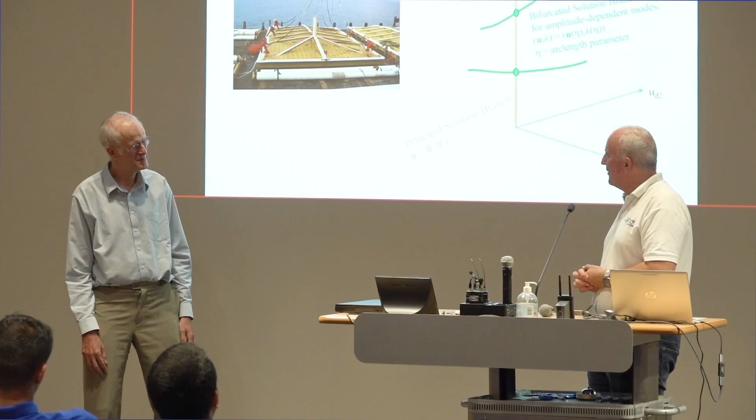Thank you very much for such a kind introduction. Certainly, it's fun to be here. Lots going on, and I've always enjoyed coming here. And so also very pleased to say a little bit about what I've been doing, mainly in my spare time, because I'm not allowed to talk about the things you do for consulting, right?

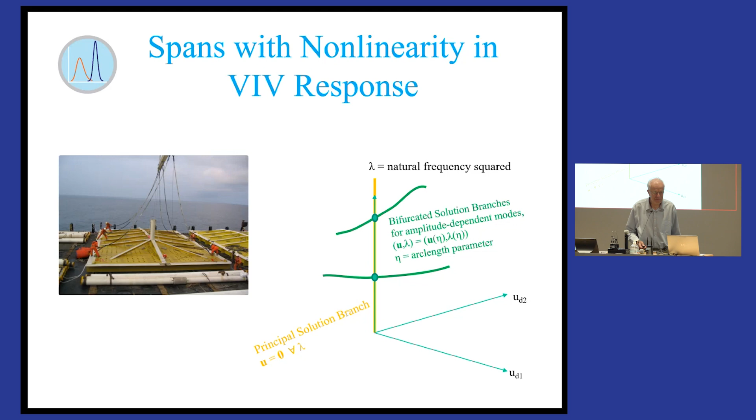So spans with nonlinearity. Okay, let's go. Why spans? Well, when I left Shell in 2016, I thought I was going to be without a job because the oil price was way down. But scour continues to happen, right? And spans continue to form, and sometimes these things raise questions. So I found there was work to do in spans, and once I got involved, I started saying, well, there's a huge amount of work done on spans, but yet when we come to make engineering decisions, there's still quite a lot of uncertainty.

And what are the key points where with relatively little effort we can get something, because I'm not a researcher 100%, I'm more of a consultant. Where are there things that with little effort I can do myself or within the team, and happy to be involved in these things here, make an impact. And then also, as I go, improve tools that you could then use. So the intent is more or less to get tools that you can improve in the actual consulting work.

Very good. Now, how about nonlinearity? Why do we talk about nonlinearity? I mean, it's easy to do nonlinearity. Any computer program can analyze nonlinearity, but it needs to do so in a time incremental way, in a time domain.

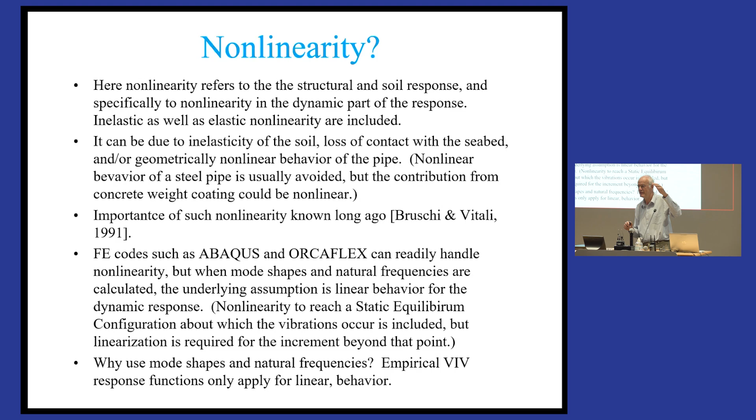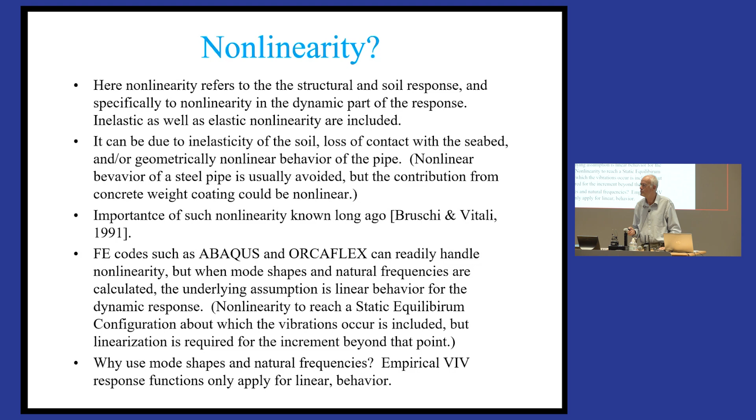It's easy to get rid of that assumption, but it hasn't been done. Why hasn't it been done? Well, the reason that hasn't been done is because there is the VIV involved, right? And the VIV is difficult to formulate in the time domain.

So what people have done, and that's the practice, is use the response functions that are used for this. And this gives you the amplitude of a single degree of freedom system as a function of the current velocity expressed in pipe diameters per natural period of oscillation and the damping. And this then forms the basis of almost all the assessments that I'm aware of that are done in pipelines. Right?

There are several parameters here that are not explicit, that DNV says they're implicit. That means that they have thought about them, but the guidance they give does not include them. That I list there: mass ratio, Reynolds number, roughness, seabed proximity, turbulence. Turbulence is being addressed, I understand. And they are known to influence VIV, but not included. And presumably DNV have done a lot of work to come up with this, have considered all these things and think that for pipelines, this is reasonable and conservative.

Now, unfortunately, there's very little documentation of why it should be this. I have sat in JIP meetings that come up with some of these things, and often there's a lot of interesting discussion. But even while still at Shell, if I asked, well, where's the report that justifies all this? They say, actually, there's a few papers out there. But the papers are not giving you enough information to justify this. But it's accepted and it's widely used. So anything you build on this will be accepted.

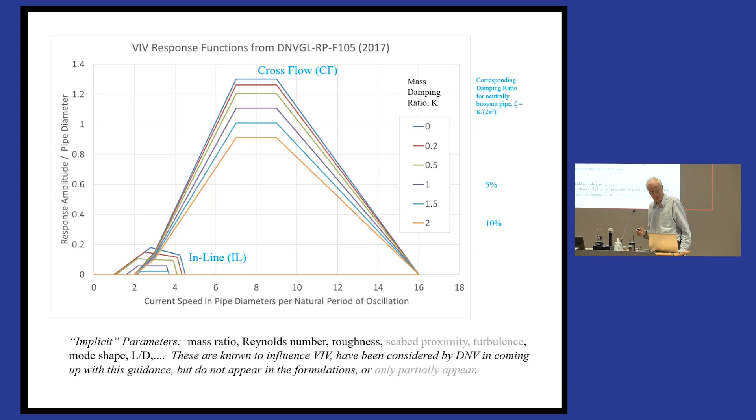Okay. So what are the ways to deal with nonlinearity? I've already referred to the time domain methods. If you do a CFD calculation, that's a highly nonlinear and highly complex calculation because it's 3D and you have to resolve the turbulence. You have to make certain assumptions about turbulence at a scale that you cannot resolve in your grid, so you have to make approximations there. When I talk about nonlinearity, I refer basically to nonlinearity of the structure or of the soil, not of the water, which will always be nonlinear.

So the incremental complexity of making your structure nonlinear in a CFD calculation would not be large. Most of the computational effort goes to the CFD. So that's one way that can be done. But it's very compute intensive. There's a lot of validation, but if you apply it for one case that you are interested in, you ask the question, has there been the relevant validation of this model? That's sometimes a difficult consideration.

And then the simpler, more efficient things are like a wake oscillator. There's a lot of papers on wake oscillators. If you have a pipe with current coming there, the blue arrow means current, the current gives you VIV and forces. And those forces you can represent approximately by attaching a mass to it with a linear spring and a nonlinear damper that basically has negative damping up to a certain amplitude, which gives you the VIV excitation. And beyond that, it goes into positive damping.

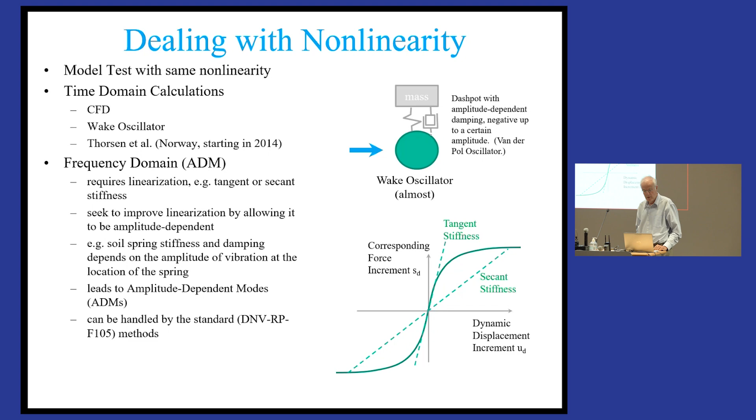So let me now tell you where is the evidence for nonlinearity. It's been known long ago that nonlinearity in spans is important, but still the practice is not doing much about it. But here's our evidence that we collected with the help of UWA for these spans, and this comes from a pluck test that we did on an operating pipeline.

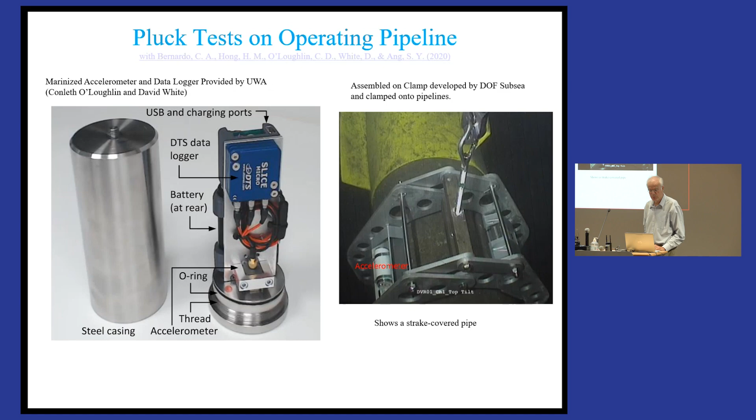And this slide here shows you the accelerometer. I think Conleth O'Loughlin was very much involved in making this. And it was then attached with this clamp to the pipeline. And then we would pull the pipeline with a weak rope that had a capacity of 600 kilos, so 0.6 tons. And then it would break, and then the pipeline would sort of oscillate.

Now, how do I try to get information out of this? Well, the most obvious thing is you pick the solution for a single degree of freedom oscillator and see if it fits. Well, it doesn't fit very well. If you try to fit the beginning, it doesn't fit at the end. And if you try to fit the end, it doesn't fit the beginning. Right? So this is interesting.

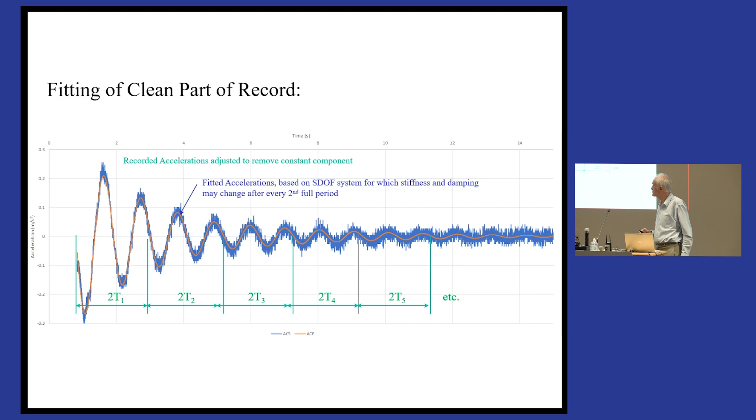Okay. So this is what that looked like for a 28-meter span, and it's one that had soil on both sides. Some spans had like grout bag supports or other things. No, this one had soil on both sides. And here is the results. What you can see is although the amplitude that was achieved was small, 4 millimeters is 0.006 of a pipe diameter at the end of this plot.

You can see here our natural frequency, for instance, that it goes down from about 1.8 something to 1.6 something, maybe a 15% reduction. Now, a 15% reduction means a 30% reduction in actual stiffness, right? Which is quite a lot, significant for this small amplitude. So it's significant nonlinearity. The damping also goes up quite a lot.

And the only reasonable way I can think of explaining this is that it came from the soil resistances at the end. And luckily here, Vasileios here for Tide is doing centrifuge tests to get better pipe-soil interaction models of this soil resistance and looking at doing some of these calculations for that. So that'll be quite interesting to see what comes out of that. So yeah, that's why the nonlinearity is important.

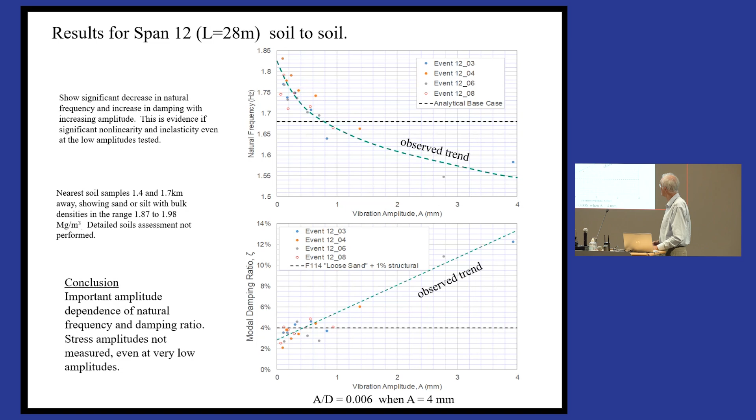How do I analyze this? I've talked about this the previous time. There's a few complications, the problem is a bit more complicated, but in principle it's the same. In this case we have a static equilibrium configuration, which I call the reference, the RSEC, reference static equilibrium, and a dynamic increment. And if you look at the modal equation, you have a stiffness that now depends on your solution. So instead of one amplitude being good for all, here the solution is going to be amplitude dependent.

And if you look at that problem, it looks like a structural bifurcation problem, just like a buckling problem. You have a principal solution branch, and at some point your tangent stiffness becomes singular, and then there will be bifurcated solution branches. Many years ago, when I was at university, before I came to Shell, I was doing a lot of work on these types of problems. So this one is relatively easy, compared to structures that buckle with many simultaneous modes, where the picture around the bifurcation points can be very complex. So I could solve this with the finite element program Npex.

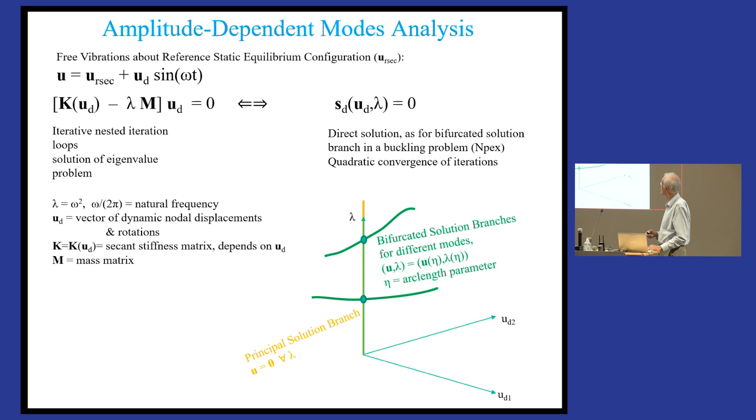Some years ago I talked about a problem also involving this, which was just an inline response of a single span. And there are a number of things that are different now. One is that I have a static as well as a dynamic displacement, whereas in the past I had only dynamic displacement. Then there can be asymmetry in the dynamic response: if your force deflection relationship is not exactly antisymmetric, going in one direction or the other will have a different response. For instance, in cross flow, if it goes down, it has soil resistance; if it goes up, it has no resistance.

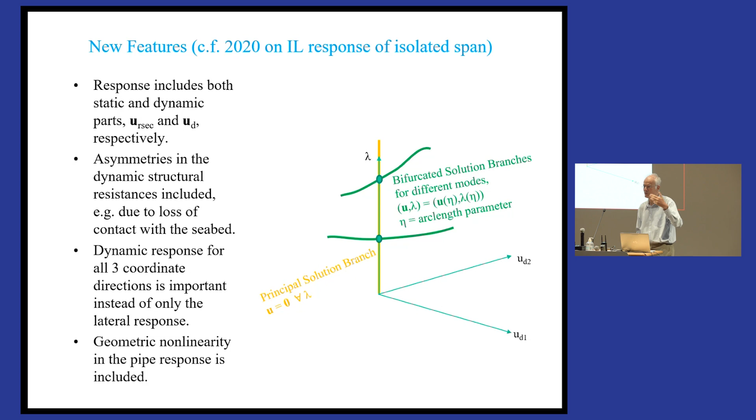And then I have dynamic response in all three coordinates, and I've also now included geometric nonlinearity in the span itself. The moment you have large rotations and you keep the axial restraint, you get geometric nonlinearities in the span itself, so those could just be included. For the asymmetries, before I would just track the bifurcated branches in one direction, because the other direction would be the same. But since it's asymmetric, I've tracked both directions to see if it makes any difference. Okay.

So then what would be a good problem to apply this to? Phil had been telling me, you're guilty, there's a lot of ZRB spans here, and you are partly to blame for that. And they have scour problems, and they're getting longer, and people are concerned about these. So I thought this would be a good example to apply these things to, the ZRB spans, and what they are is this. I came up with this again.

I think that need is what mostly creates invention, because it's not just having the idea, but there must be a need for it so that project managers are willing to take the risk to do something new. If the old thing can work, it's unlikely they will, because they want something very, very reliable.

If you're a project manager, anything that goes wrong and delays your project is trouble. So you don't look for really high optimal solutions. You look for something that you know can be done, has been done, and can be done in a given amount of time.

But in this case, there were reasons we wanted to get the stresses quite low. There were challenges with the welding, getting the CRA welding to go. So a proposal came up to do this, so you could get trigger buckles quite closely spaced, without any risk that one fails to trigger and you get more displacement in another. That's when we started doing the ZRB spans in the South China Sea.

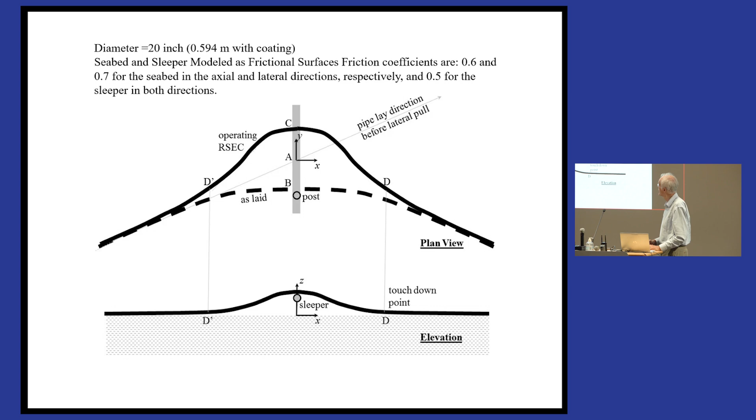So this is the analysis done, and that is the sketch, and these are now the results of the analysis. For the analysis, you need to first do the static, quasi-static part, which is basically simulating the pipe lay. You simulate the lay barge, the S-lay, and then I simulated 2 operating cycles because the configuration changes a bit with the buckles - the buckles become wider. After 2 operating cycles, I looked at what the VIV response is. That's what we're going to look at now.

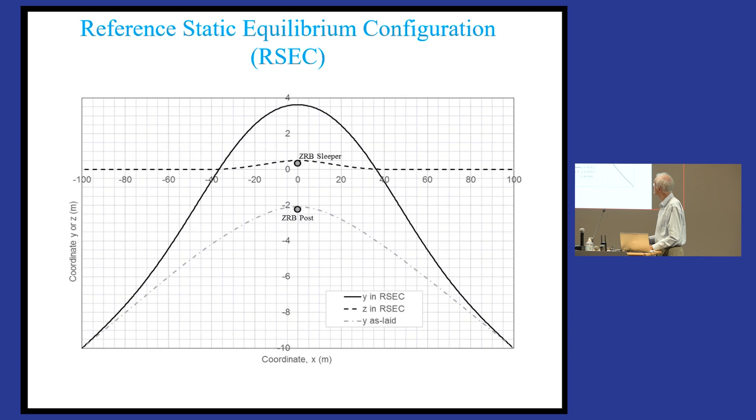In this case, it's the opposite. Our inline natural frequency is higher than the cross-flow natural frequency. Why? This is basically because of the ZRB nature of this thing. We have a lateral out-of-straightness, and that acts as an arch. I'll show you how it acts as an arch.

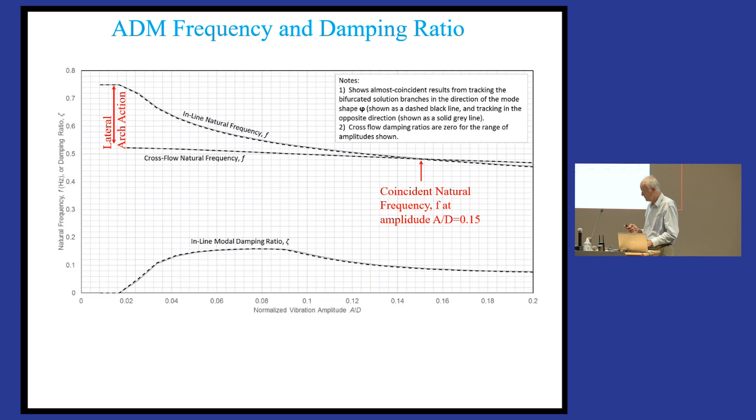What you can also see here is that at about A over D 0.15, the two modes become coincident in natural frequency, and then strange things can happen when they become coincident, as we will see. Okay, so now this is the effect of the axial displacements, why that's so important.

The horizontal at first has only a very small vertical component, but as the amplitudes of the horizontal motion get larger and the frequency starts approaching the frequency of the vertical mode, suddenly that mode shape starts to veer off and have a larger and larger vertical component. So what happens there is complicated, let's say.

But fortunately, we will see that we don't need it. Already at the low amplitudes, we're already getting so much damping that we will never get any inline response, as we will see.

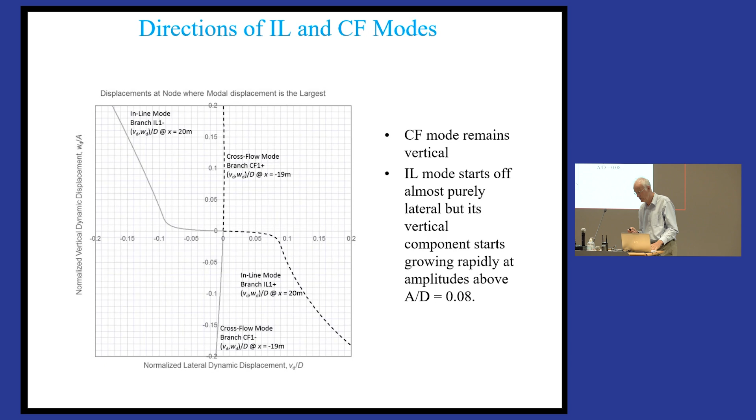Now, what do I do to validate these results? Well, I can't, without a time domain VIV model, compare the response for VIV.

But what I can do is apply a load that is kind of similar to what it sees in VIV, and then compare, on one hand, an incremental time history analysis, and on the other hand, the results you get with this linearization method.

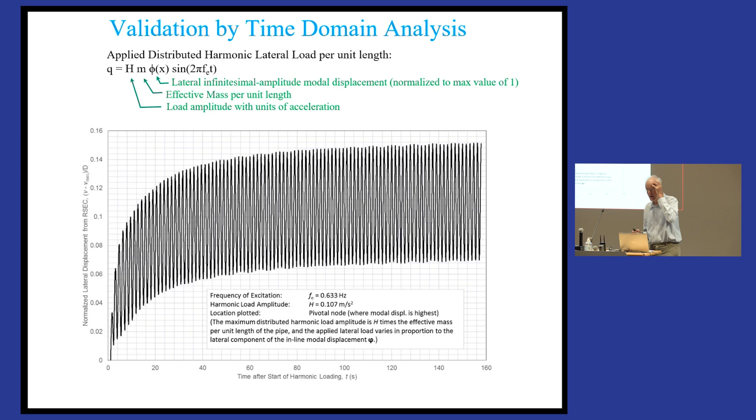What I do then is I looked at the last 8 cycles, and from that I get an amplitude, and that amplitude I plot at the next plot, and I do that for a number of different cases.

And what you can see is they all agree pretty well, except for one. One is far off. Mind you, also note that most of these are pretty low amplitude. The highest amplitude is 0.09 diameters, and that's where it goes far off. So it's getting to where those modes start interacting, and that's where it starts going far off.

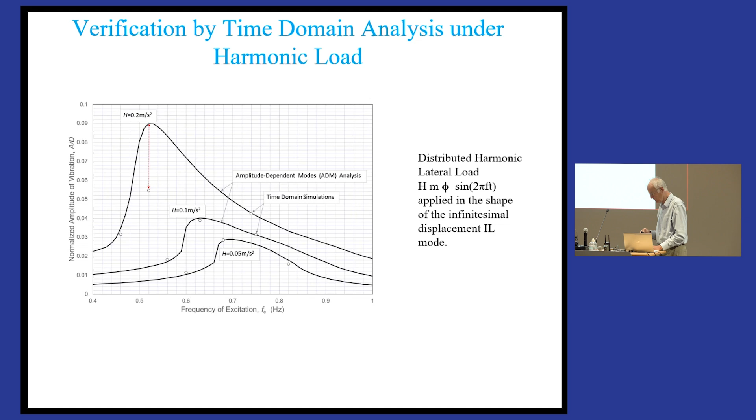What happens there with the case that goes far off? Well, this is the response I get for the one far off. I apply a harmonic load, but the response is not becoming harmonic. It's still almost chaotic. It's sort of beating and it's doing things. The amplitude I plotted was based on the last 8 cycles, and actually elsewhere it has a higher amplitude.

On top of that, on top of the inline amplitude, there seems to be a cross-flow amplitude coming out of these excitations that's even larger. And that is the plot that came out too low when you used the numericals. But if you include all these, if you look at the highest amplitude, it's closer.

I think it does still show that if you have strong nonlinearity, be careful about linearization. You can't avoid it. If the problem is difficult, it's difficult. There's no way around it, right?

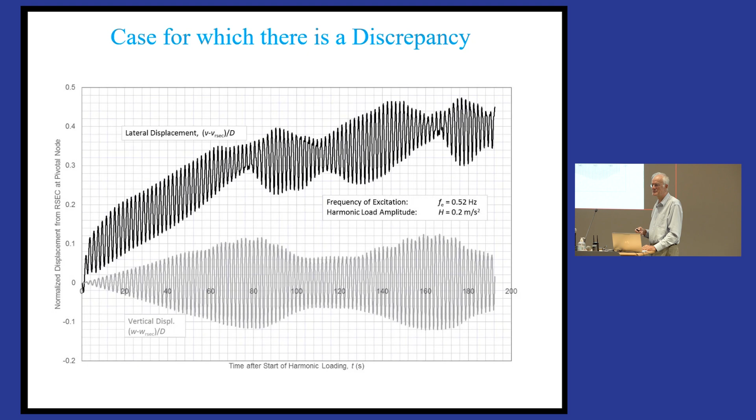Now, what's the effect of this on VIV? What I did is compare with just the standard method you would analyze. If you do the standard analysis, you don't rely on much axial restraint at the sleeper, so let's assume zero axial restraint. Use soil springs like they are recommended in the recommended practice that everybody loves because it tells you exactly what to do, and do the analysis.

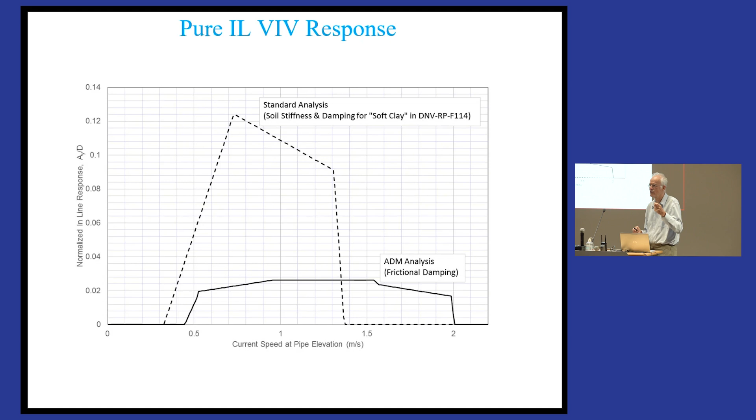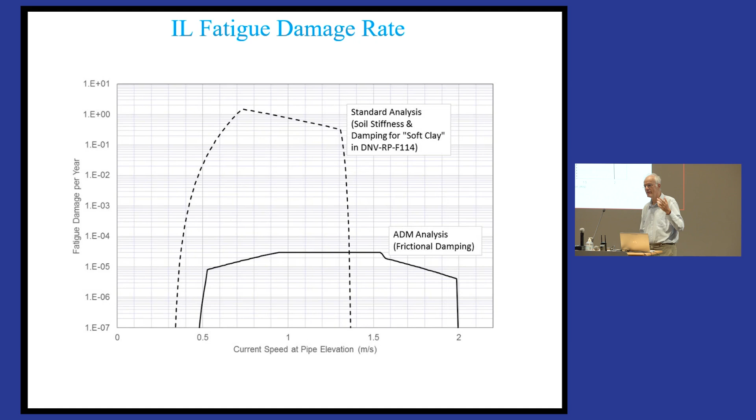Crossflow is a different matter. Crossflow is much less sensitive to damping and also kind of complicated for the ERP span.

So these are the conclusions about the ERP span. I think I've mentioned these already.

So what are the general learnings we can draw about this linearization method, more generally than just the ERP span? When we linearize, we are typically looking at one mode, and we do the linearization that's appropriate for that mode. But if we're now going to have a multi-mode response, we can do a linearization for each mode. But the reason we do multi-mode is because we want to superpose. Now, superposing nonlinear things does not work, right?

So then it becomes a problem, right? You tend to get interactions between the modes instead. So if it's really strongly nonlinear, you might have to think about other ways. You could get some idea of the effects with this, but it's not going to necessarily be the full answer to the story.

Oh wait, I went backwards instead of forwards.

Now, what about future R&D priorities related to spans, right? I think more pipe-soil work, because having had these capabilities to account for pipe-soil interaction in a realistic way, we don't have very good pipe-soil interaction models yet. I think some of the work done here in TIDE is going to help with that, because we will have more pipe-soil interaction models developed more realistically rather than just the simple frictional model I've had here. So I think that's very important, and I certainly look forward to the cooperation here too.

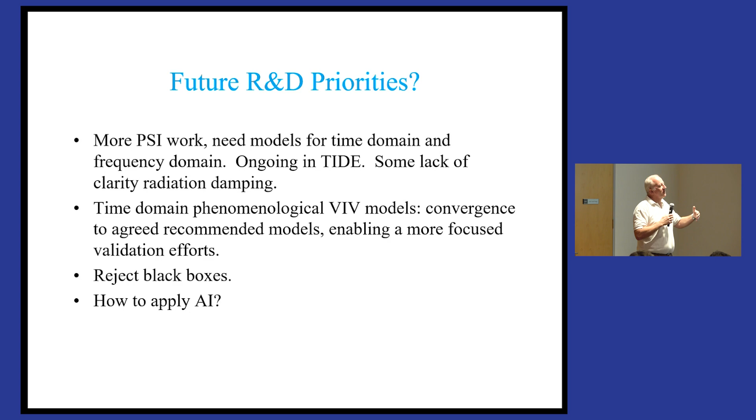Right. But when you go to VIV, if it does vibrate, now you're talking large numbers of cycles, many hundreds of thousands of cycles over its life. So would you expect it to change? I would imagine it's going to head towards a steady state and a softened response. How do you translate the work from the pluck, which is closer to static because of the number of cycles, into outcomes for a lifetime with large numbers of cycles? No, this is what Vasileios is doing. Huh?

So yeah, that's certainly a good point. But even if you reach a steady state response, there can still be an amplitude dependence, right? And I think that's what we do see. It may be less, I guess. Maybe more, maybe less, but it may be quite different to that semi-static response when it's a small number of cycles. The properties may be different. A large difference from a really stiff, small displacement response through to a secant stiffness which would drop quite a lot, versus at the end of the large numbers of cycles, the sensitivity may change, I guess.

Yeah, certainly if it's a clay type soil, it might be initially the undrained strength, and with many cycles, it becomes the remolded strength, right? For instance, which is quite a different strength. Yeah, I think that's certainly the case. We can't tell from this test, but maybe in the future we can, right?

And then you could think about doing, then you have to be even more courageous. I understand that here in Australia, people don't dare to do pluck tests because they're afraid that you'll do damage to the pipeline. We calculated the stresses and we thought it was okay. Needs must, I think. You needed to do it. And then you could even think about putting a vibrator on it, and then you could keep it vibrating for longer.

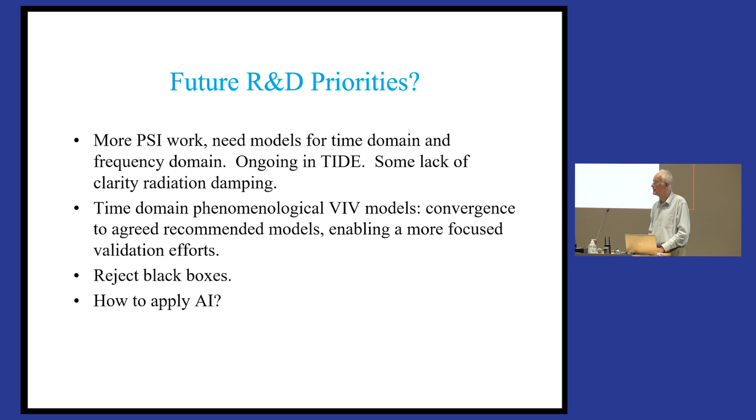I guess we know that some of our partners have done that and put sensors on and have measured data. We'd be encouraging others to do the same, but there are some challenges, even with monitoring, in how you use that data. One of the key issues is, can you trust it? You have data for a short period still. Can you extrapolate out? And DNV has some limitations in its current guidance in regards to how you can use outcomes from short-term monitoring periods. That kind of works against the cost associated with acquiring that data. Right. Which is a bit of a shame. Any other questions?

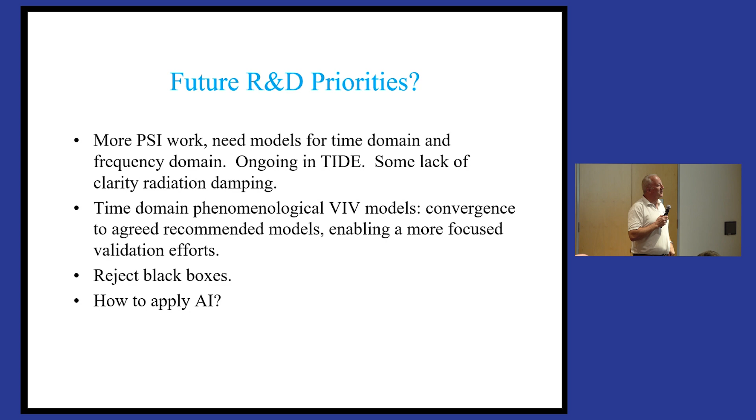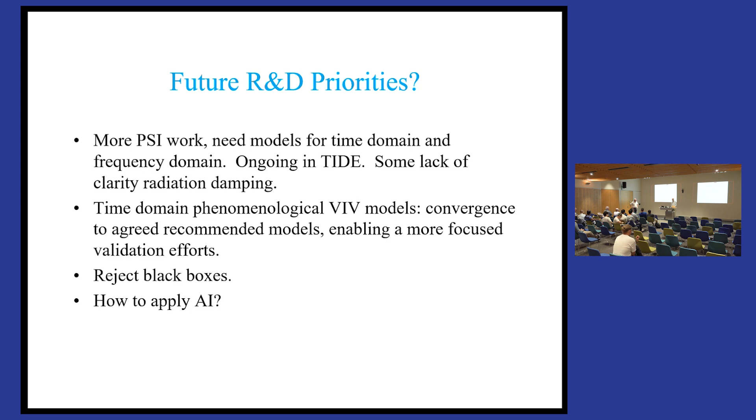Thank you. So Chris Sanders is asking, are there any considerations around point force loading, like a pluck test, versus distributed load testing, like the real world? Well, yes. If we look here, where was it?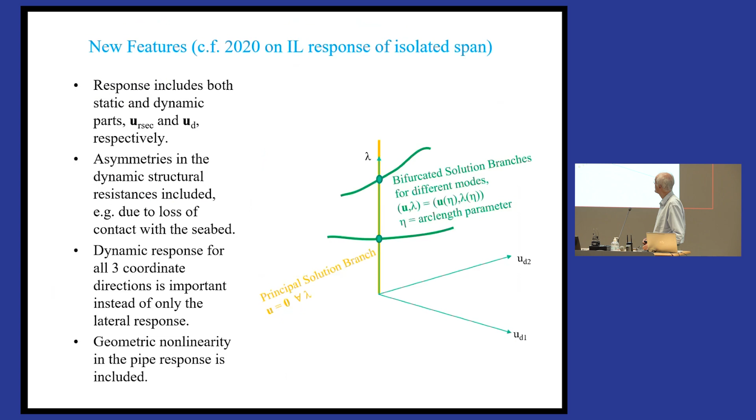We did all kinds of pluck tests, and some of them with mini spans and different things. And some of the pluck tests actually were quite strange. I could not interpret them in terms of modal properties.